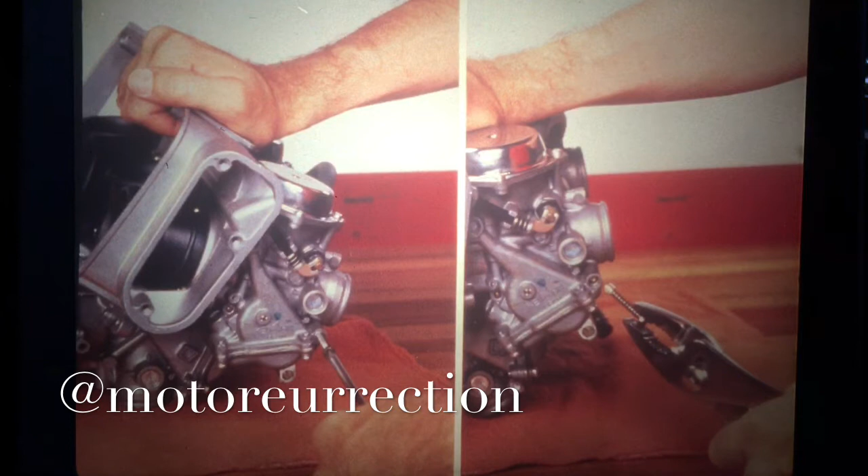If you're working on a V4, you'll find the long drill bit handy because it can bend around this coolant tube. Now thread the 4mm self-tapping screw into the plug and pull out the plug. And this is important. Remember to install new plugs after adjusting the screws. It's federal law. New plugs are now available from American Honda. You can order them by their code number,

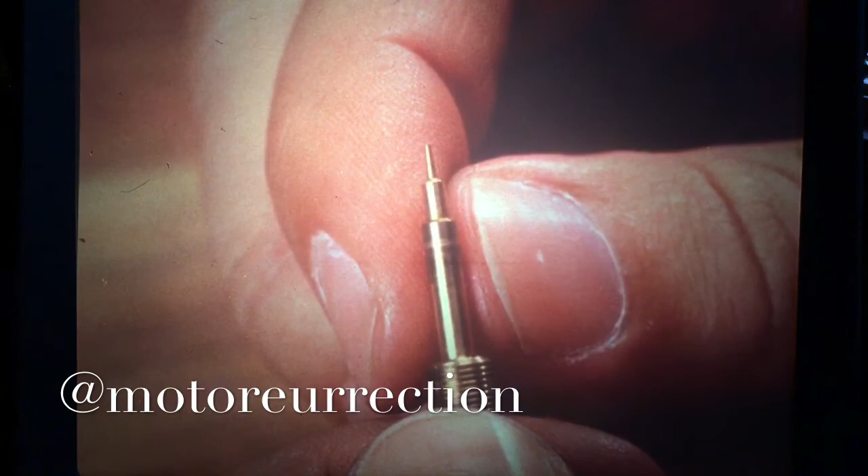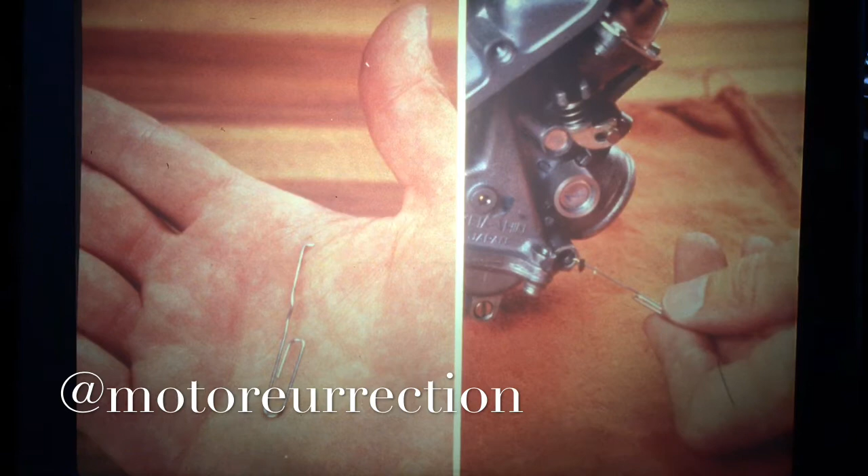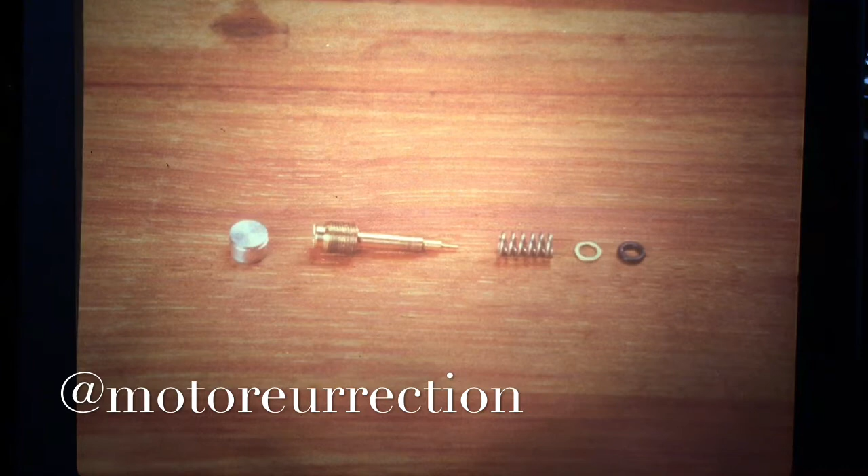HC128703. Inspect the low-speed screws of all the carburetors for wear or damage. Pay special attention to the screw's taper. If any one of the screws is worn or damaged, replace it. When removing the low-speed mixture screws, you might have difficulty also removing their washers and O-rings. A paper clip bent this way is a good tool for getting them out of the carburetor. And finally, when installing new low-speed screws, be sure to install the spring, washer, and O-ring in their proper order.

Okay, that's the diagnostic sequence. First, determine the complaint. Then test ride to verify the symptoms. Next, use the quick checks to eliminate other possibilities. Then use leak-down and spark gap tests to focus even tighter on the complaint. And remember to use the emissions tech line before you take the carburetors apart.

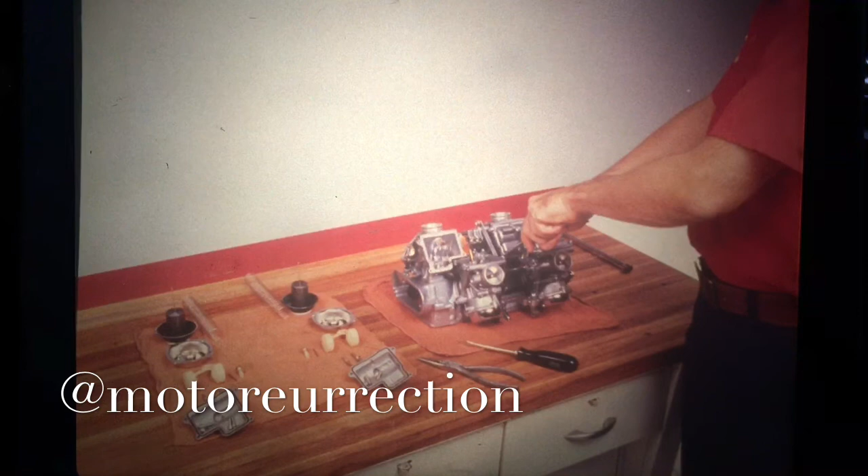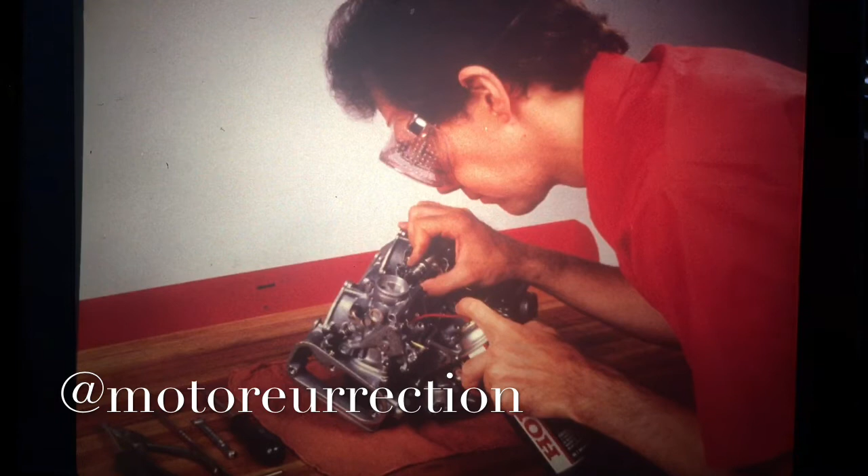After viewing this section, you'll know some important carburetor parts differences, how to clean carburetor low-speed circuits, precise float level and synchronizing techniques, plus a quick and accurate idle drop procedure. Most V-engine carburetors can be completely cleaned while still attached to the airbox. This is good because original linkage adjustments stay undisturbed. Clean carburetor low-speed circuits are essential for good throttle response and idling. Here's a quick and efficient way to clean them.

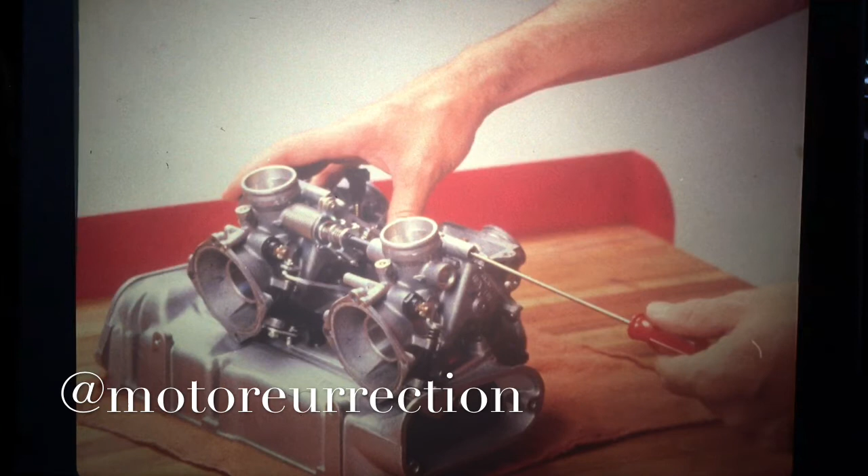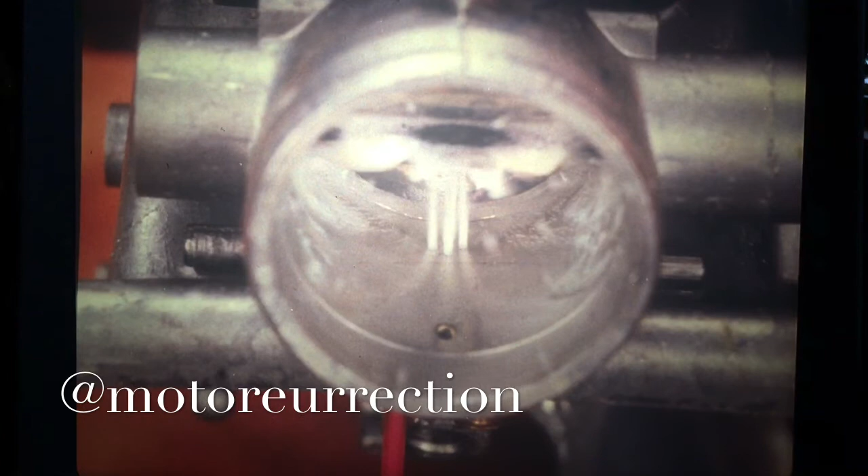These 4 tiny bypass circuit holes in the carburetor throat can get clogged during winter storage or by contaminated fuel. This is how they're cleaned. With the mixture screw in its hole, turn the screw in all the way and gently bottom it. If you're not careful, the screw and its seat will be damaged. Next, remove the low-speed jet. Now, with the throttle plates opened slightly, spray cleaner directly into the low-speed jet hole and follow with compressed air. You should see vapor coming from the 4 bypass holes in the carburetor throat.

And this is the last step. Turn the low-speed screw out a few turns, then spray carburetor cleaner into the low-speed jet hole. You should see vapor coming from the idle mixture port in the floor of the carburetor. So that's how it's done. And the other carburetor circuits are cleaned in a similar manner. And finally, be sure to always wear safety goggles when working with carburetor cleaner. It's a powerful solvent and could hurt your eyes.

Now, let's talk about what makes each type of Honda carburetor special. It's no secret that Honda makes many different carburetors to meet today's varied requirements. Some of these differences are obvious, while others are more subtle. And remember this tip. When disassembling these carburetors, work on one at a time to avoid swapping parts. Some parts look the same, but are really different. Here are some things you should know.

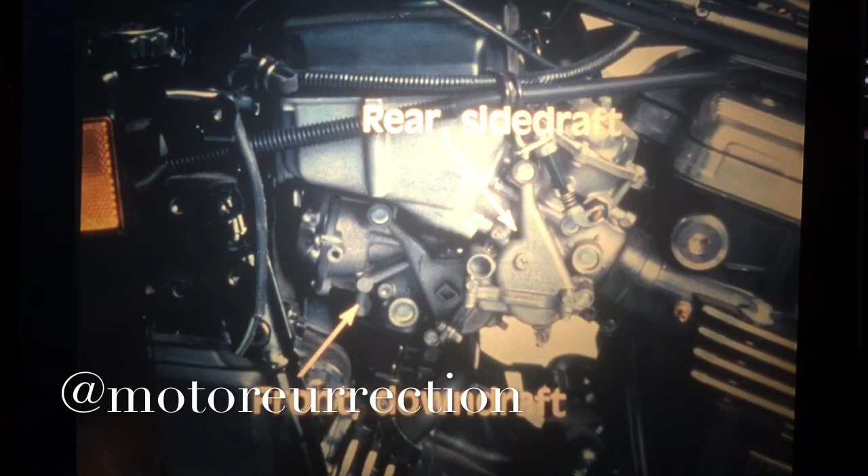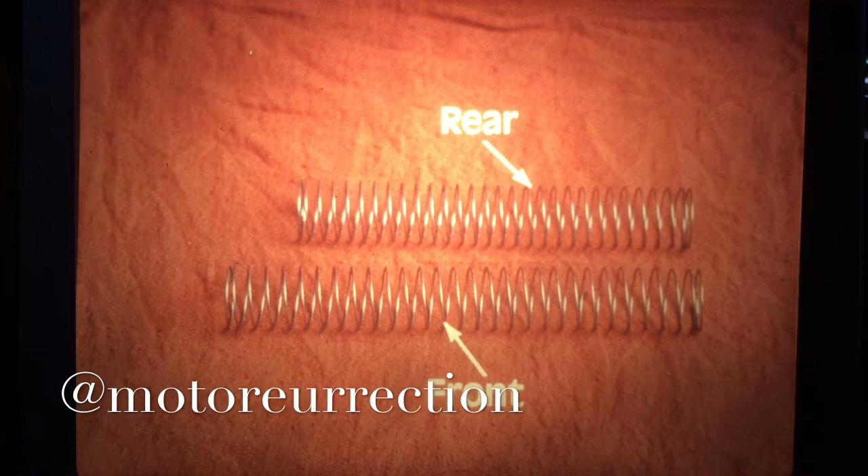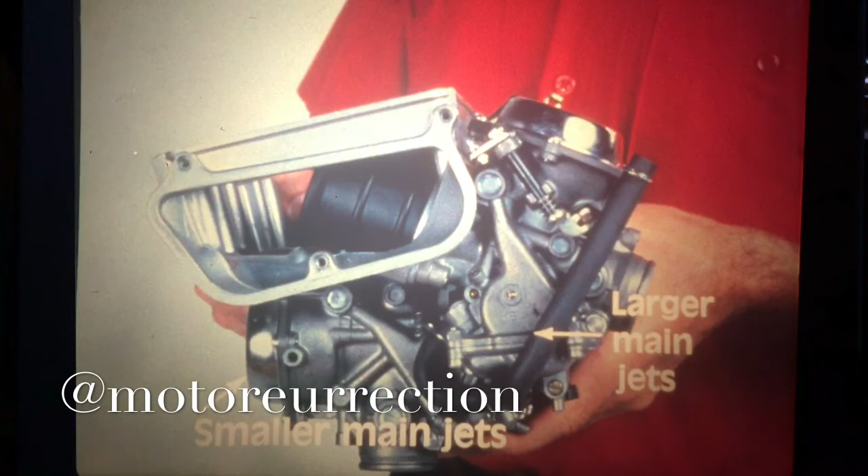Let's start with the V4 carburetors. While the same basic casting is used, the front carburetors are downdrafts and the rear units are side drafts. But that's not all. The vacuum piston springs in the front carburetors are longer than those in the rear. This is the case with most, but not all, Honda V4s. And when assembling the carburetors, be sure to install the front and rear emulsion tubes in their proper carburetors, because they're not always identical. Also, in just about all V4 models, the main jets are of different sizes.

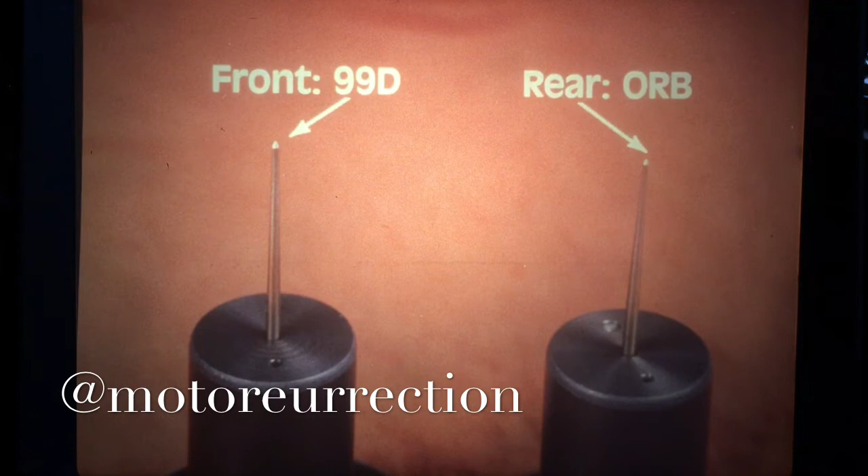Jet needle sizes can vary too. So when reassembling V4 carburetors, make sure that each needle is in its proper carburetor. For example, these are front and rear jet needles from a 1982 Sabre. These parts are different because the fuel levels are different in the front and rear carburetors. Fuel in the rear carburetor has to rise farther to get to the venturi, and the different main jet and needle compensate for this.

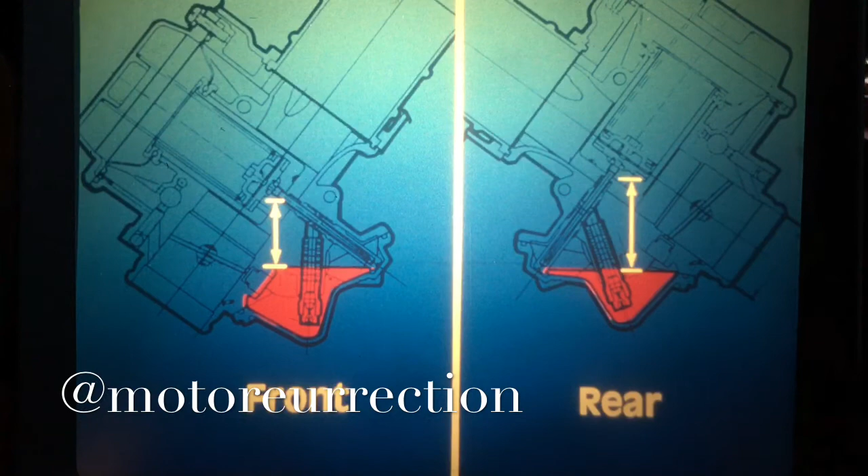Remember too that some carburetor parts for California bikes are different from those for the other states. Parts designated AC on the microfiche are for California motorcycles, and those designated A are for the other 49 states. And here's a maintenance tip.

When choke cable free play is insufficient, the choke valves can't open properly, so the engine may stall in traffic or have a slow return to idle.

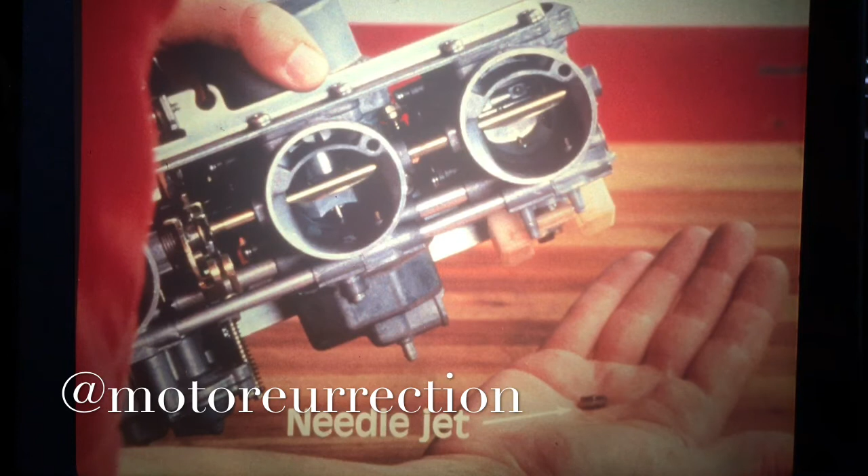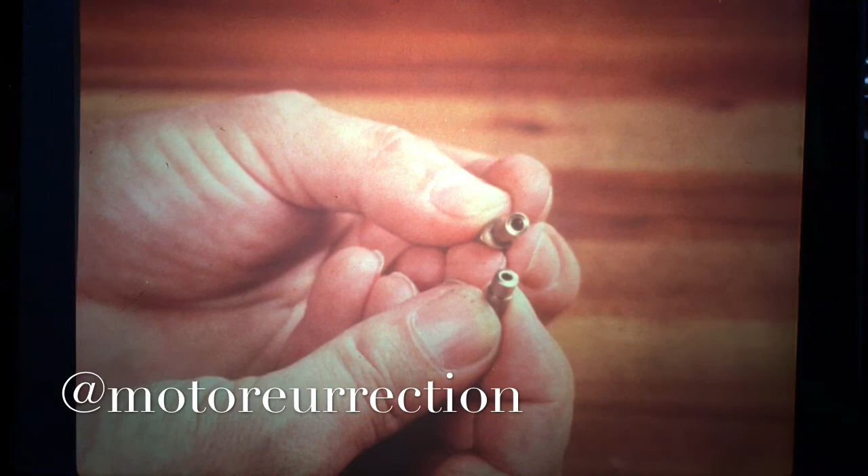Simple adjustment corrects this. Also, take special care not to lose the needle jet. It can fall out when the emulsion tube is removed. The GL1200 and CR series carburetors are the exceptions here because they have pressed-in needle jets. But if the needle jet does fall out, be sure to reinstall it right side up. Simply match the convex lower side of the jet with the concave top of the emulsion tube.

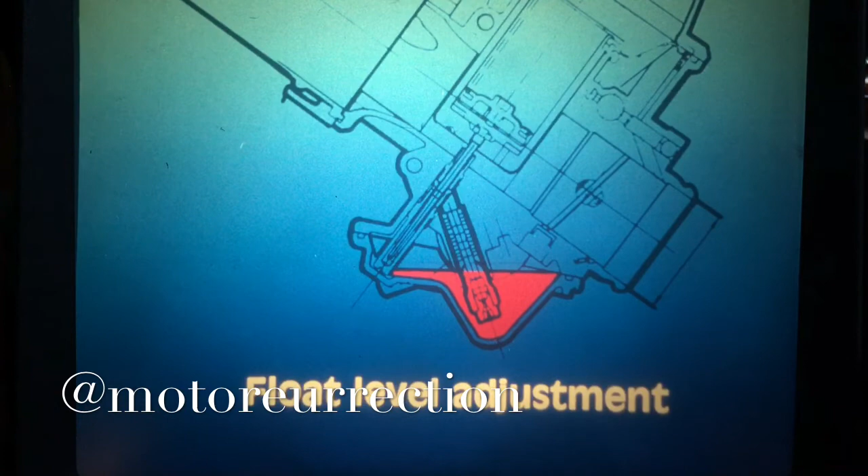The carburation differences you've seen are important, but they aren't the only differences you'll find in your work. So to do a good job, always refer to your shop manual or tech line when in doubt. After cleaning, you should check and, if necessary, adjust the float level of each carburetor as it is assembled. Here are some tips about float level adjustment.

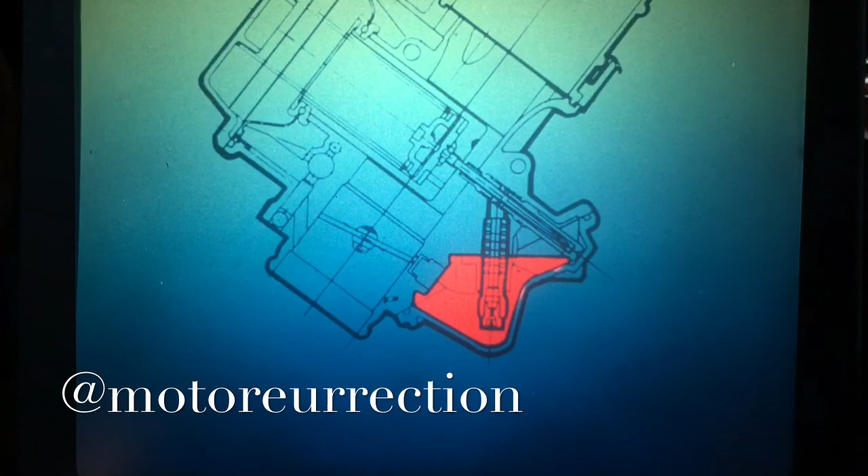Honda's V4s are quite sensitive to float adjustment, particularly those with float bowls vented to the airbox. The shop manual tells you how to check float level, and this will make the job easier. Use a vernier caliper to set the height on the Honda float gauge. The caliper has smaller increments and allows more precise measuring with the float gauge.

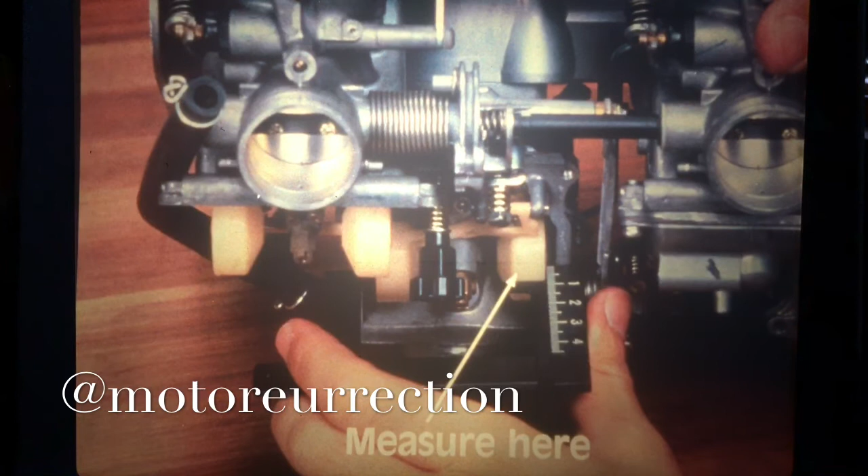Also, remember that float level is measured with the carburetor on its side, with no compression on the float valve spring. This is important because it allows consistent and precise measuring of float height. And remember this, when setting float level on V4 carburetors, measure float height at the short side of the float pivot. The float is off-center, and you can measure its height better on the short side.

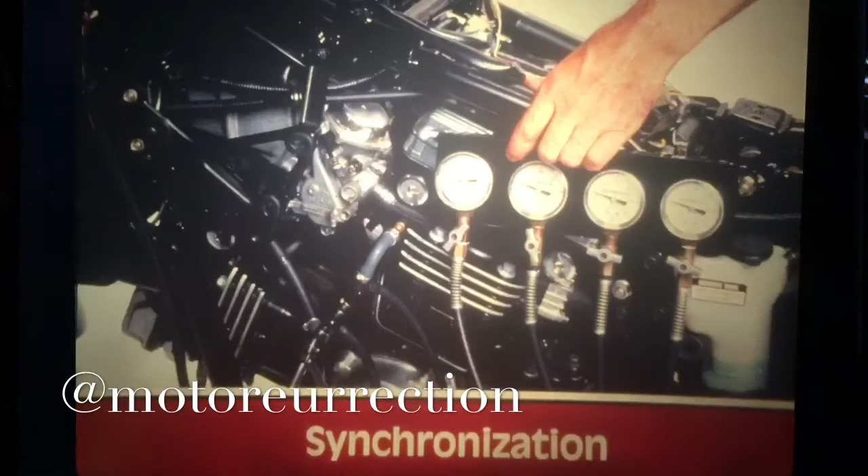And finally, V4 carburetors are sensitive to synchronization too, so follow your manual closely here. This is the base carburetor. It can't be synchronized, but all the other carburetors are synchronized to it. You can tell the base carburetor in a multi-carb system. It is the only one with an idle speed adjustment screw.

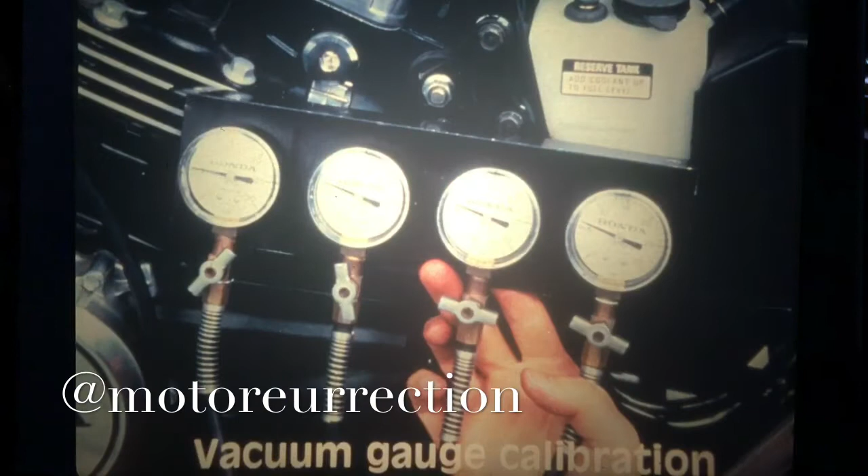And this will make things easier when using vacuum gauges to adjust V4 carburation. Calibrate all 4 gauges at one vacuum source before synchronizing the carburetors. These gauges are being calibrated at the manifold vacuum port of the number 1 cylinder.

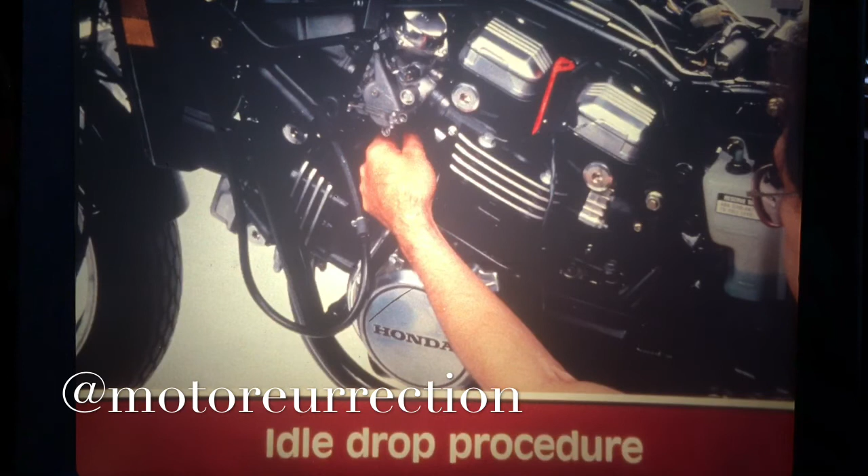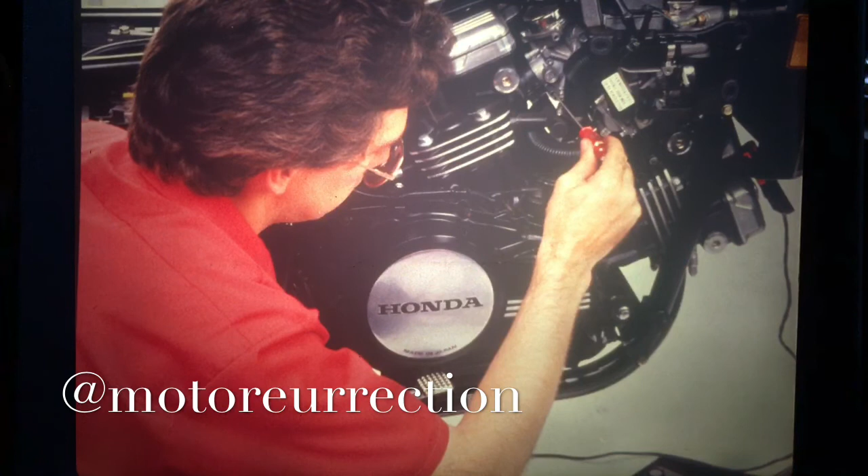The last adjustment to make is the idle drop procedure. This involves adjusting the low-speed screws using a recommended tachometer to achieve the optimum setting for best carburetor response and cleanest running. And in case you had any doubts, a properly done idle drop procedure yields results as good as any exhaust gas analyzer. Now here are some basics for the idle drop procedure.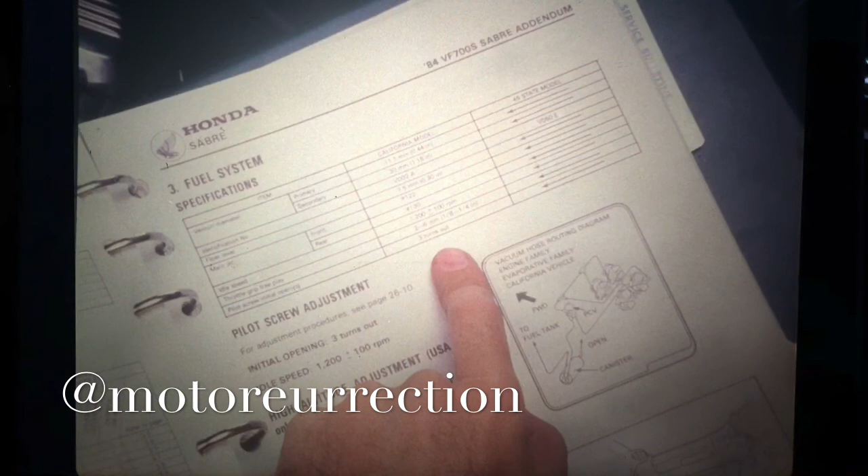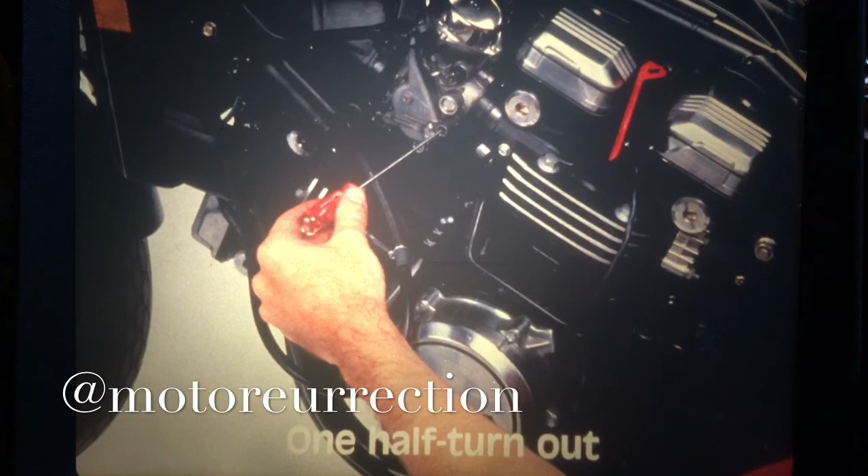The first step is to put all 4 low-speed screws at the initial setting specified in the manual. Next, attach the tachometer to the warmed-up power plant. Start the engine, adjust the sensitivity control of the tach if it has one, and set idle speed to specifications. Next, turn all low-speed screws out 1/2 turn and see if engine speed rises. If it doesn't, don't turn them any farther.

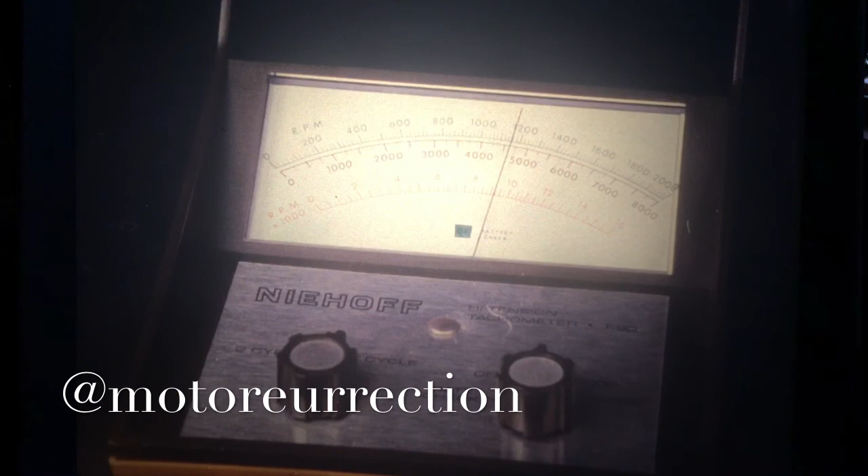If engine speed rises 50 RPM or more, reset the idle speed and keep turning all 4 low-speed screws a 1/2 turn at a time until engine speed stops rising. Then reset idle speed. Now, move on to the number 1 carburetor. Slowly turn the low-speed screw in, but stop turning it when idle speed has dropped the specified amount from peak idle RPM. In your final step, you'll turn the screw outward from this position. The exact number of turns varies with each model, and your shop manual has the specifications. Repeat these steps for the other carburetors.

So these are the key points of cleaning and adjusting Honda carburetors. Keep all the circuits clear and clean. Be aware of parts differences that affect service. Know the importance of carburetor synchronization and float levels. And remember that the idle drop procedure is a simple, effective tuning method.

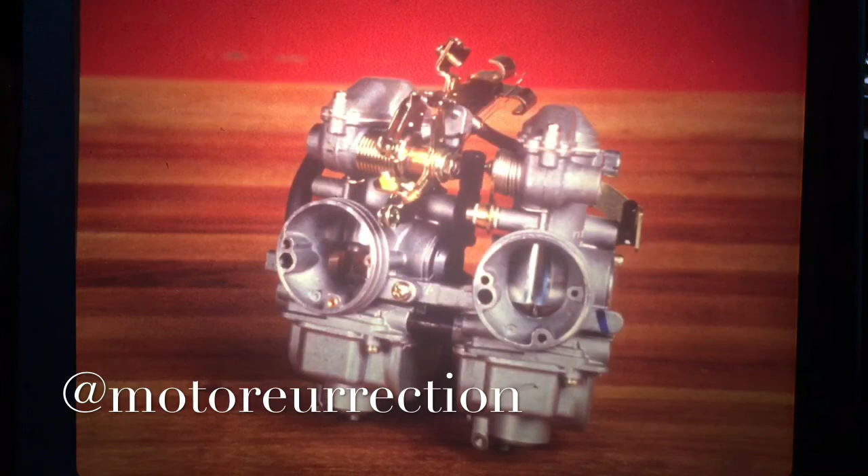Well, that about covers it for the new generation of carburetors from Honda. Sure, some may look a little unconventional, and others kind of complicated. But remember that these carburetors work according to the same physical laws as any other fuel system. And remember, too, that modern fuel systems are designed to make your life simpler, not more complicated. As a matter of fact, considering the many benefits provided by these clean-burning carburetors, it looks like things will be better for just about everybody.